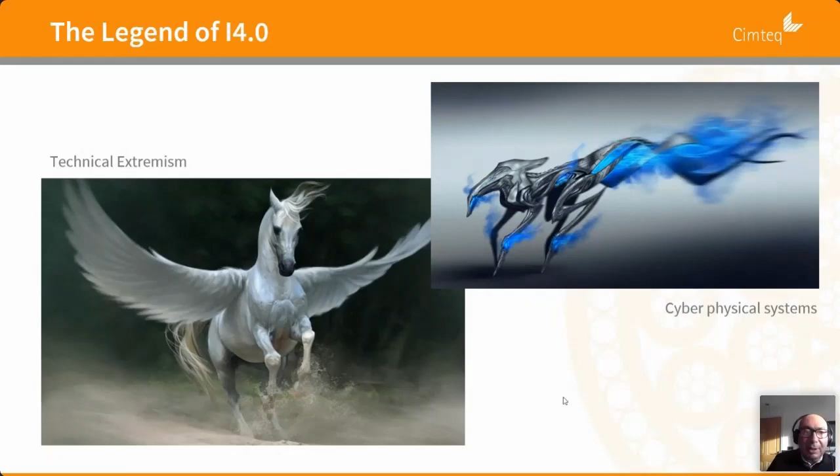But the reality is somewhere in between. And I call these guys technical extremists, really. Now, that's then. Things have changed since then, and reality has struck. So the reality of Industry 4.0 really is to achieve business objectives in the quickest possible way, at the lowest possible cost and the highest possible quality. That is really what we were trying to do with Industry 4.0.

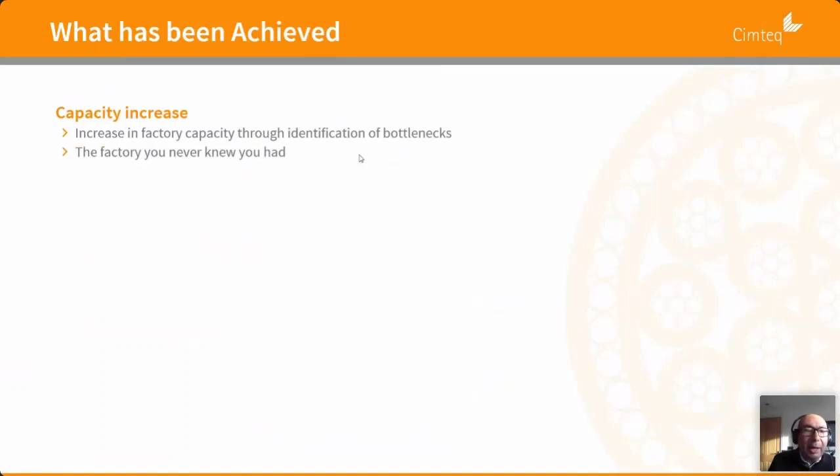Okay, so that said, let's look at what has been achieved, not necessarily in the last year, but in the last few years, where Industry 4.0 technologies have been used, mainly MES and digital twinning, which we will talk about later. Now, what it's done to factories is in the area of production capacity. It has revolutionized that, because by installing an MES system, for example, you're able to look at your production and identify bottlenecks in your factory.

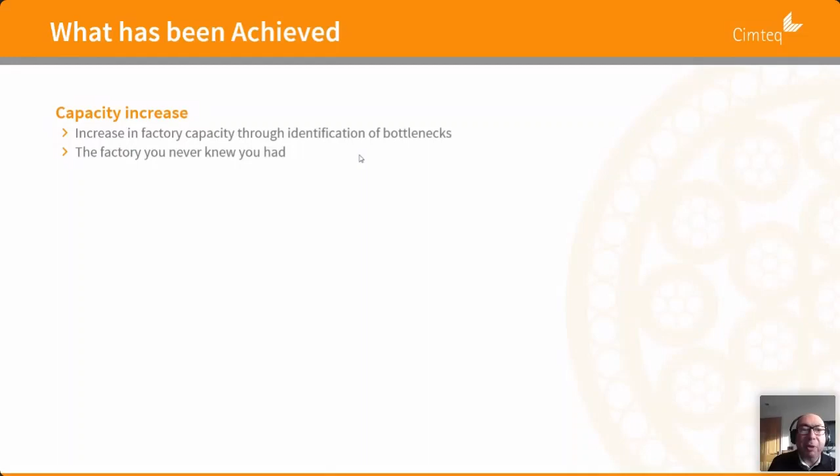Now, as a lot of people will know, by removing those bottlenecks from your factories, the products will go through much quicker. It is a factory you never knew existed. It's like using extra capacity which you never knew existed. And with the use of MES, you can see where work in progress is backing up. It can identify bottlenecks, resolve them, and monitor the progress of that resolution too.

Material savings. This is, again, a typical example from one of our customers, using our MES and our cable design system, Cable Builder. The two are linked together. So information is passed from the production lines about radial thickness, I think, in this case, or diameter. And in the background, we have an SPC analysis engine going on.

When that has finished its job, it starts recommending to the design engineer how to improve the design, the material utilization on the design. So it says, come on, you are giving away too much material. Consider running the process closer to the target, because this factory has been set up for many years. Tolerances haven't been changed, but processes have been improved, and the process in this case is much more capable than the design engineers were designing the cables for.

So they saved a lot of money. This is a jacketing line. They saved a lot of money on materials, so reduce the material usage, improve the profitability of the factory, etc.

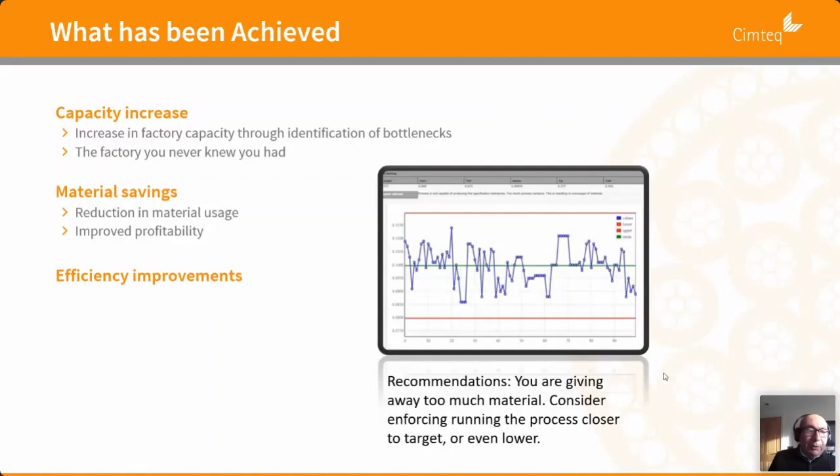And next, I want to come to efficiency improvements. So decreasing of downtime using downtime analysis, increasing machine speed using OEE and various losses analysis, etc. And as linked again to capacity, improving lead times, because we're running faster, you are producing quicker and improving lead time.

And finally, quality improvements. And all this we have seen in the last few years have come out of these technologies. So quality improvements, mistake prevention. I can give you an example where an operator is busy making a fiber cable. He puts in a reel which contains fiber into a cable, and then this particular machine is connected to MES, and suddenly the machine starts alarming and stops him using that fiber because it's the wrong fiber.

So he scanned in the wrong fiber to use on that particular product, and that one incident has saved our company over $50,000 of scrapped cable. Not to say the embarrassment of shipping something that is wrong to the customer. So these technologies, although they are not cheap, they will pay for their cost very quickly indeed, in all these improvements and the savings that you can make.

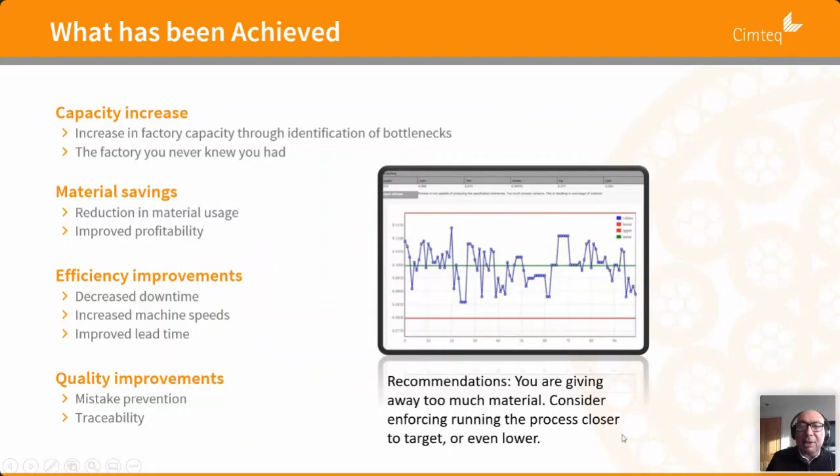Also talking about quality is traceability, a strong traceability, and the cost of traceability and the quality of traceability improves when you're using these technologies, particularly MES. Okay, so we talked about what can be achieved with Industry 4.0 and smart methodology, and I want you to remember something. Remember that message that is coming from the machine, effectively, to the design engineer to tell them what to do.

Okay, so I've seen a lot of pictures on the web, etc., saying, okay, what is Industry 4.0? It's the same as Internet of Things. It's the same as a smart factory. Well, no, it's wrong. It's not. Also, there is a smart factory that includes Industry 4.0, Internet of Things, and MES. Again, not quite. Close, but not quite.

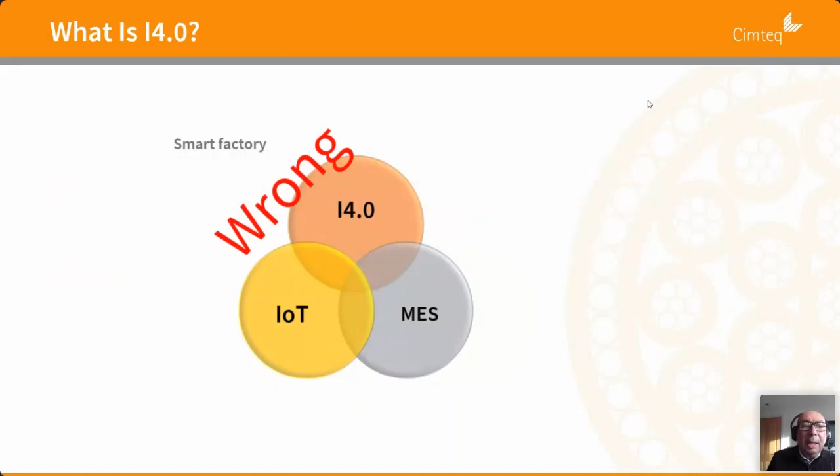But to actually understand Industry 4.0, we need to go a step back, which is to Industry 3.0. These are in the days where lean was a big thing, and lean was a methodology that we employed in our cable factories. And then we had technology like automation or PLCs, SCADA, etc. And we had robotics in some factories, which is great.

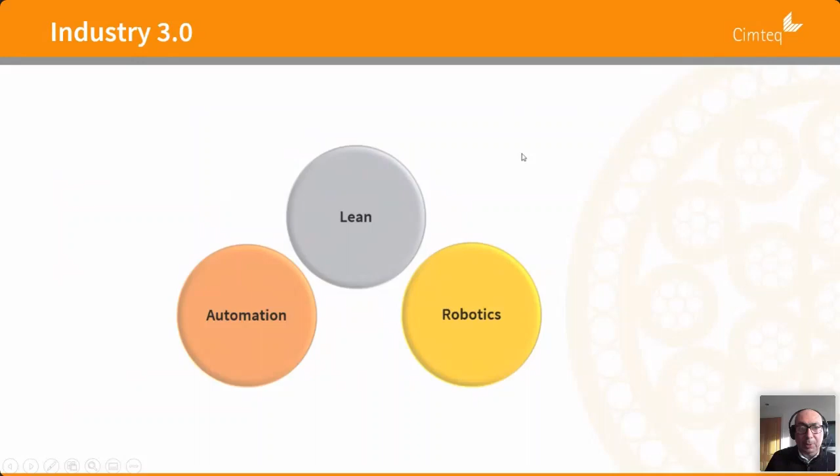So Industry 3.0 consisted of two things: the technology, which is the automation and robotics, etc., and a methodology, which is lean. And everybody understood lean and worked with it quite well. So to understand Industry 4.0, it is the same thing.

So we've got the technologies like Internet of Things, and incidentally, when it's used in industry, it is now called Industrial Internet of Things. Then you got cloud computing, you got MES, and you've got many other technologies, which are the Industry 4.0 technologies. But the methodology is smart, and we will cover that in a second.

A smart factory. And if you think about smart now in the modern context, it's like mobile phones, smartphones, smart cars. Yeah, if you have a Tesla, it's a smart car. It updates itself. It diagnoses itself, etc. So we'll look at smart in a bit.

Okay, so let's look at some of the technologies in Industry 4.0. Cloud computing, a lot of things are happening on the cloud, quicker, much more global. With cloud computing, you also have to have security, cybersecurity. Robotics is again part of Industry 4.0. Virtual and augmented reality. Only this morning I was reading about one of the cable manufacturers using these.

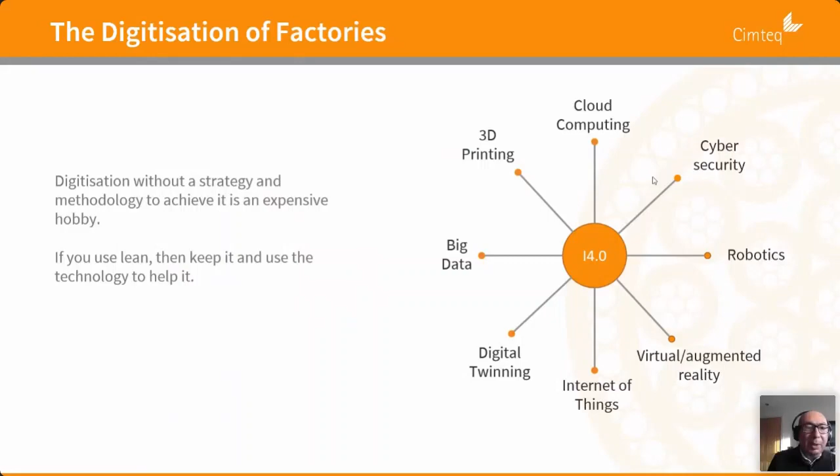So, for example, if you are using lean, don't worry too much about smart. If you're using lean, use Industry 4.0 technologies to help lean manufacturing, to accelerate lean manufacturing, to help you solve the problems, as problem resolution is the essence of lean. So yeah, don't get hung up on the smart bit. Use the methodology that works for you.

Okay, we used to talk about the integrated factory, and that helped a lot in the 90s, early 2000s, in fact. So an integrated factory has many systems shown in a pyramid. So you start your design in CAD, it goes to ERP. Then MES and planning gets its data from ERP, and eventually the data flows down the pyramid to the PLCs, which then send them to the machine sensors and all that.

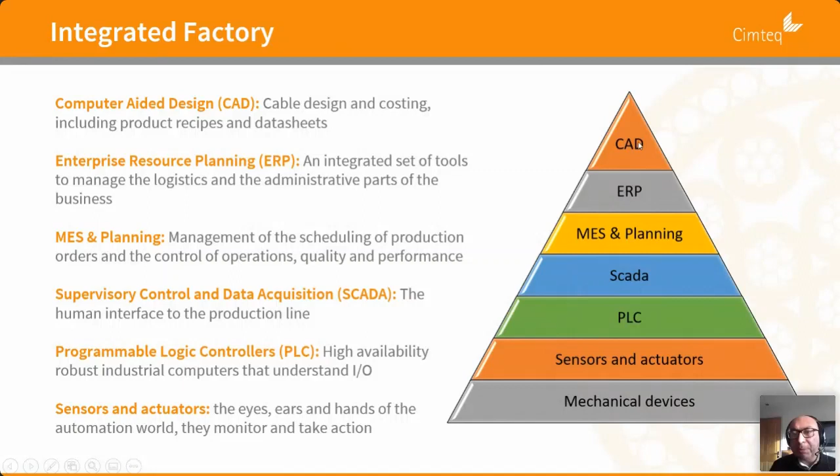And data doesn't really flow in multiple directions. It goes from top to bottom. And sometimes it goes from bottom to top, but it doesn't go right all the way to the top. So that's an integrated factory.

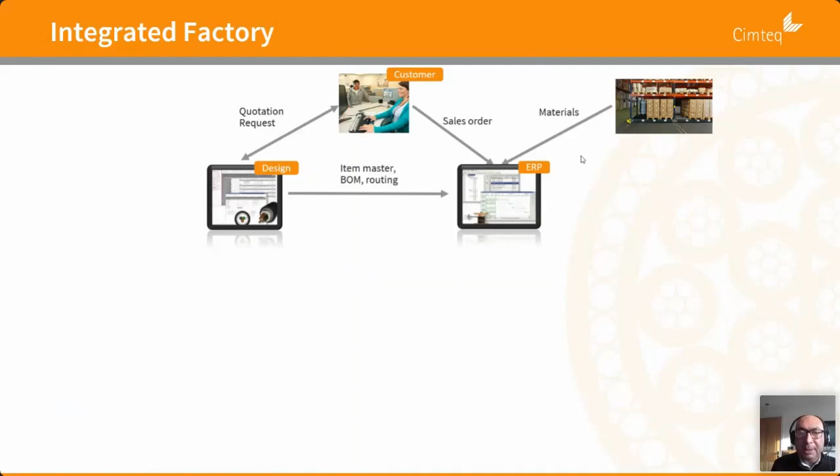In reality, what happens? Somebody designs a cable. They send a quotation to the customer. The customer then orders the product, the cable, that is done through an ERP system. When you design the cable, the bills of materials and routing also go to the ERP system or are held in the ERP system. Materials are then ordered to replenish the warehouse from the ERP system.

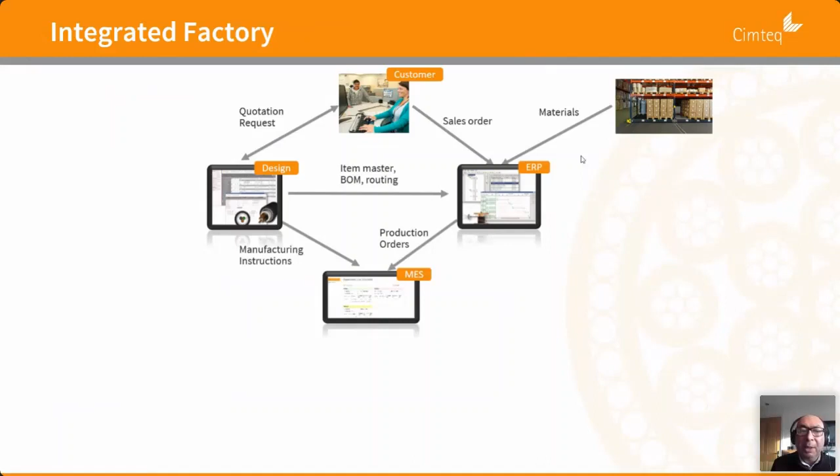When it's ready for production, the ERP system will then send production orders to the shop floor with manufacturing instructions. They are then sent to the operators, which are then sent to the PLCs, if you're lucky, if you have that level of automation, and machines can be controlled. Usually, recipes are held in SCADA and sent to production lines if production lines can accept them, or you have that infrastructure.

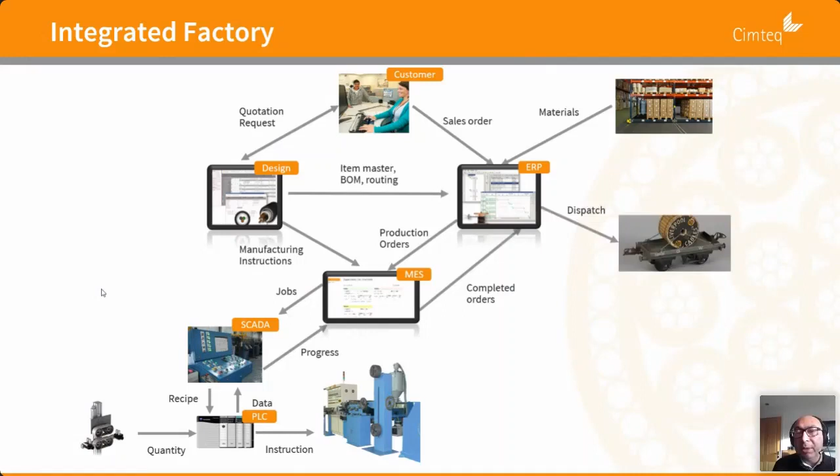You also have other devices connected to the PLC, like a length measurement device here. And once a production order is complete, progress is reported to MES to say it's finished. That is then reported to the ERP system, and the ERP system will then order dispatch to the customer.

Okay, so how does that differ to a smart factory? In a smart factory, a lot of these things still happen. But what happens is a smart factory is communicative. So there's communication between people, between machine and people, between people and machine, and between systems and machines and machines and machines. And it's adaptable. So if there is something that needs to change, it can be changed. So the smart factory in its essence can be adapted.

Same as your smartphone. It is very adaptable. So you put an app on it and it does something new. And it's also communicative. And it's collaborative. So you are collaborating again with other instruments, other people, other machinery, customer to supplier, etc. So this collaboration is also part of the smart movement, if you like. Calling it smart movement. So what does that mean?

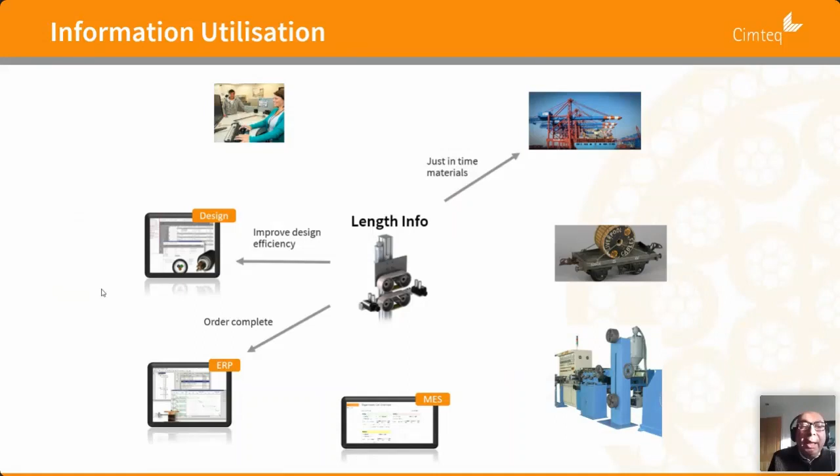So the same information can be sent to the design through some aggregation to improve the design. So we saw before about material utilization, but efficiency as well. So you can calculate the efficiency of actually running that cable on the machine, calculate OEE, etc. And that is very useful in the design aspect and the costing of the cable.

Of course, length is used within the machine itself, by the production operators and production engineers to influence the efficiency of the machine, again by downtime analysis, breakages analysis, etc.

And short length alarms. Now, in the past, where you had mechanical counters, etc., it was difficult to detect when a short length occurs. But now, when a short length occurs, it triggers an alarm immediately, so somebody could take action before the cable goes further and further value is added to it.

And the length information can go to sales, and they can inform the customer of the progress of that particular order, of where it is. It can be used to order trucks to dispatch a cable when the length is about to be reached for the final product. So what this is doing here is one piece of information is used in multiple areas of the business, and it's used immediately for its immediate benefit.

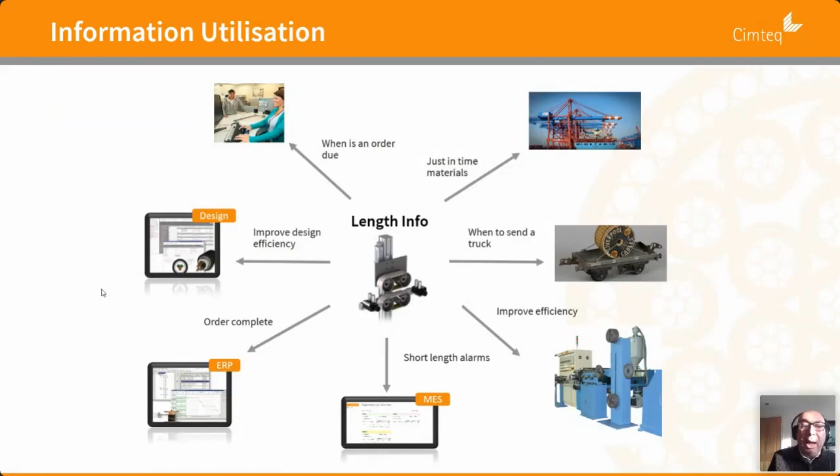Now, how does this work in reality? This works by having an intermediate layer, which is what we call the Internet of Things, the Industrial Internet of Things platform. What that does is collect information from the shop floor, signals like length, like diameter, like any sparks, etc. And they make them available to higher systems in the organization. So they're made available to MES, to ERP, to design departments, to sales, to other machines, etc.

So what we say here is we're democratizing information. So everybody in the business, every system in the business has access to that information and can use it in a way that is conducive to its operations.

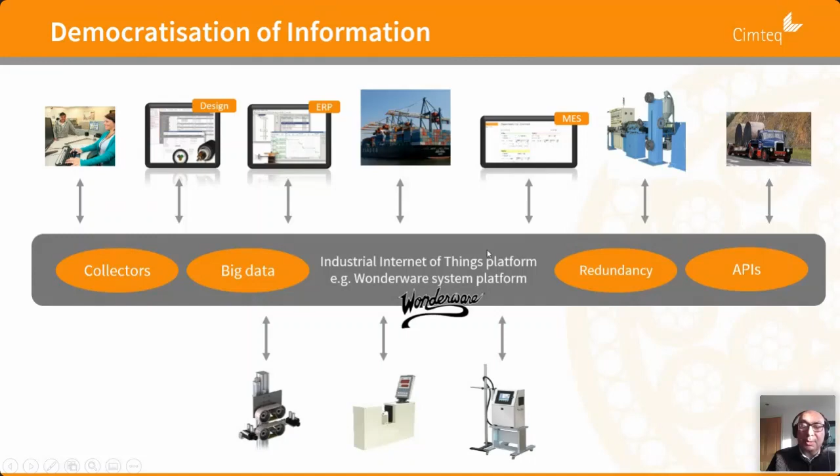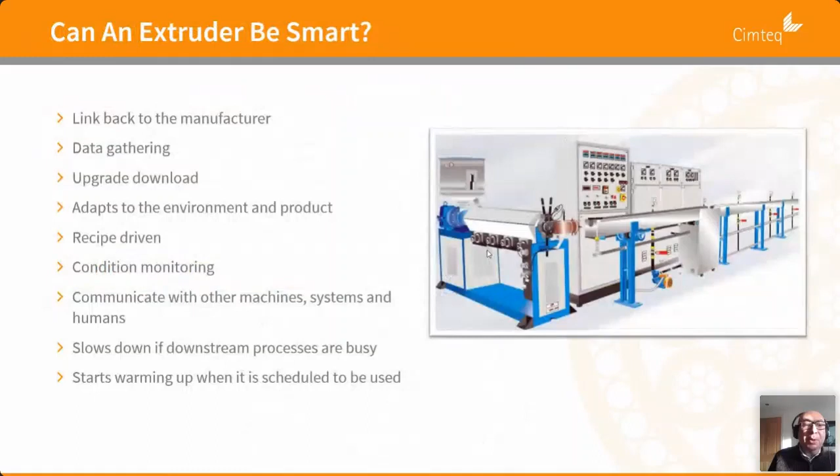Okay, so can an extruder be smart? Well, yes, because it will have attributes like communication, collaboration, continuous improvement, adaptability. So for example, extruders can now link back to the manufacturers. Data can be gathered on the extruders and sent back to manufacturers to analyze the efficiency of the operation of the extruders.

Extruder software can be downloaded to the machines, to the PLCs and to the SCADA to improve the efficiency of those machines, and that can be done by the manufacturers themselves, of course, under control of the local engineers. So an extruder now is adaptable to its environment and the products it's making.

Recipe-driven, more and more we see recipe-driven production, so you have consistency of a product across different operators, different shifts, etc. And you have recipe management tools like CableBuilder, for example, which will maintain the recipe to the product design. So there's less mistakes, less quality issues that can arise.

So machines can communicate with other machines. And using the Internet of Things platforms, a machine, when it's not producing as quickly as possible, could tell further machines down the line to slow down, hence reducing the amount of quality issues downstream, which can be unnecessary.

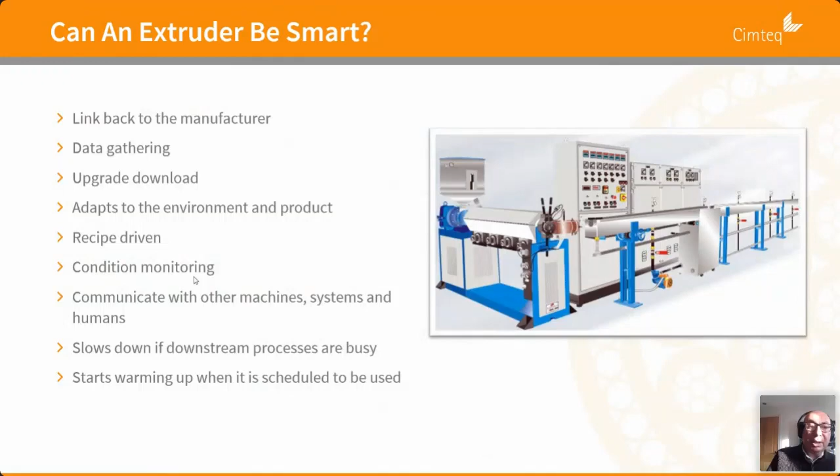Okay, so these smart assets, we just talked in this case about extruders, but we also talked about other things which are part of Industry 4.0. There are assets like MES, like digital twinning, like various other assets. The data is a huge asset. So these smart assets are becoming smarter.

But smart assets don't make a smart factory, as they say. A smart factory has to be communicative. You have to use the smart asset for communication, adaptability, and collaboration. And strategy is definitely needed.

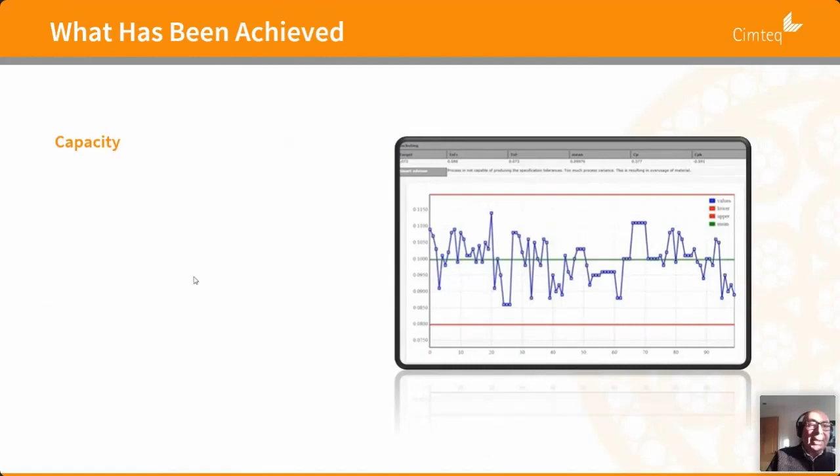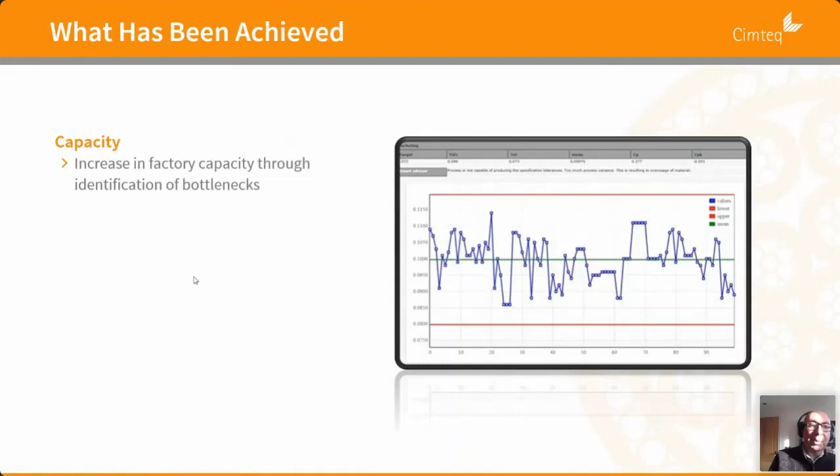Okay, so let's just go back to see what has been achieved now in the past 2 or 3 years, really. Capacity improvements in factories. That has been quite a revolution. Factories have doubled their capacity in some cases. I know one factory who thought their bottleneck was the stranding line, and after doing some analysis, eventually found out the bottleneck is actually the armoring line. And by resolving that, they really accelerated the throughput through the factory. They built a new factory almost.

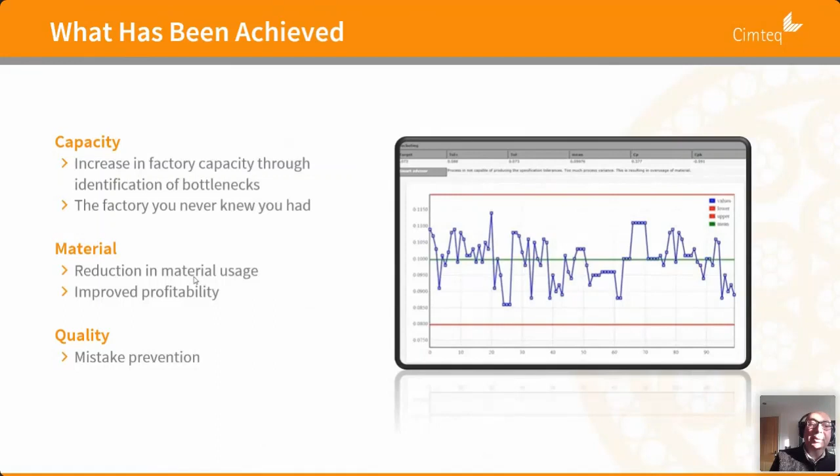Material utilization, where we saw how somebody has saved a lot of money by the system communicating with the design engineer to say, you're doing something not wrong, but out of date. We saw how mistake prevention saved the company a lot of money. Okay, so it's a smart thing to invest in the smart tools, as I say. But is it the right time?

Well, contactless remote working has really pushed that forward as well. So you don't need to step into the factory to monitor what's going on. It is with the current situation, and hopefully that will go away. But what it has done is having to remote monitor, having alerts rather than going and searching for problems. Problems will come to you. When there is a problem detected, you will get an alert, you get a notification, and then you will have all the information at your fingertips to resolve a lot of these problems remotely.

So there is a little, not little, but there is less substantial involvement with the direct physical shop floor at this stage. Everything can be done remotely. And this is what I call electronic self-service as well.

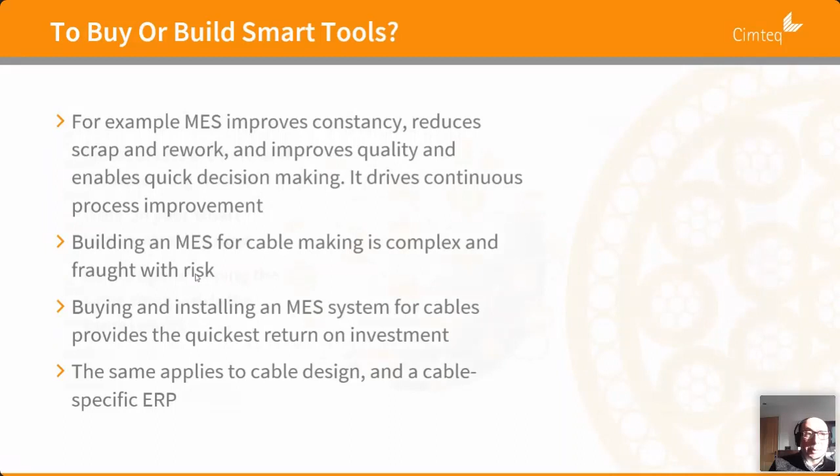Okay, smart assets, as I said, smart software, smart machines, a lot of things are becoming smarter, and they are on the market. So really, I ask you to work on your smart strategy, and the next webinars will help you with those as well. And be disruptive, because these technologies are not passive. You have to be prepared. And again, go back to the smart factory. The smart factory has to be adaptable. It has to be communicative, and has to be continuously improving.

So you will see disruption, but disruption is good in this case, because if you keep doing the same thing, you will get the same results. If you want different things, you have to disrupt the status quo. So yes, please do go ahead and have a strategy and implement that strategy for being smart. Not forgetting, again, your existing methodologies. If you're using Lean, include that as part of the smart factory.